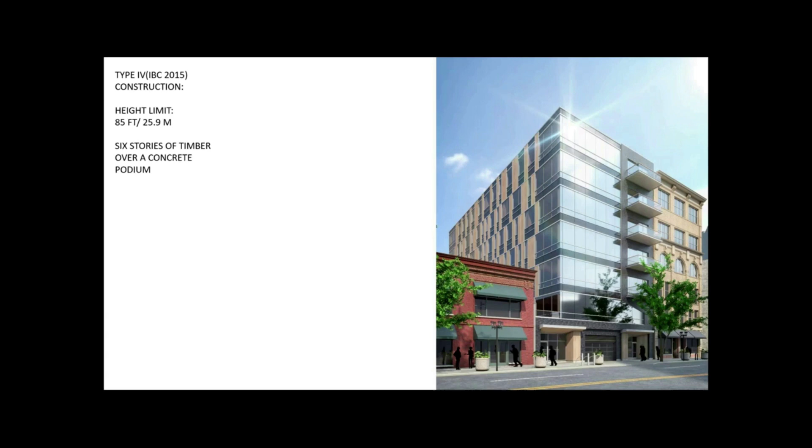Typically, we start off with what's allowed as of right in most timber construction in the US. Here in Wisconsin, we operate under the IBC 2015. We are allowed up to 85 feet in height and up to 7 stories - 6 stories of timber over a concrete podium. This is another small project we designed for the same developer as Ascent, but it represents what is as of right in most of the US.

But then in February of 2022, Intro Cleveland opened up, and it became the first mass timber high-rise approved and built in the US at 9 stories tall. It's 7 stories of timber over a 2-story concrete podium, and for a brief while was the tallest mass timber hybrid building in the US, and remains, I believe, the largest by volume in terms of fiber.

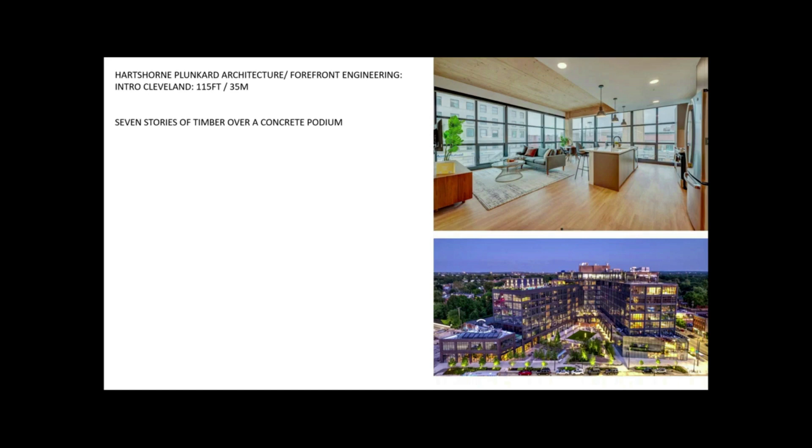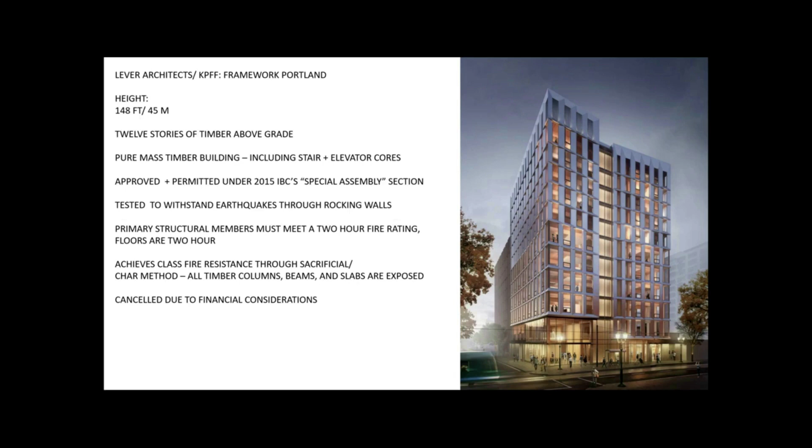This is Framework in Portland, Oregon, and it is important because it is the first mass timber high-rise building to have been permitted in the US. It's 12 stories of timber. The superstructure is 100% timber above grade, and they used the AMMR language - the Alternative Materials and Methods methodology - to achieve approval under Oregon's building code. The project was permitted, as I said, but it was never constructed due to financial considerations.

Until recently, the tallest mass timber hybrid building in North America was Brock Commons in Canada. It's 18 stories, 17 floors of timber over a 1-story podium. Brock Commons achieved approvals through a 100% encapsulation strategy, which means there is no exposed timber in the building.

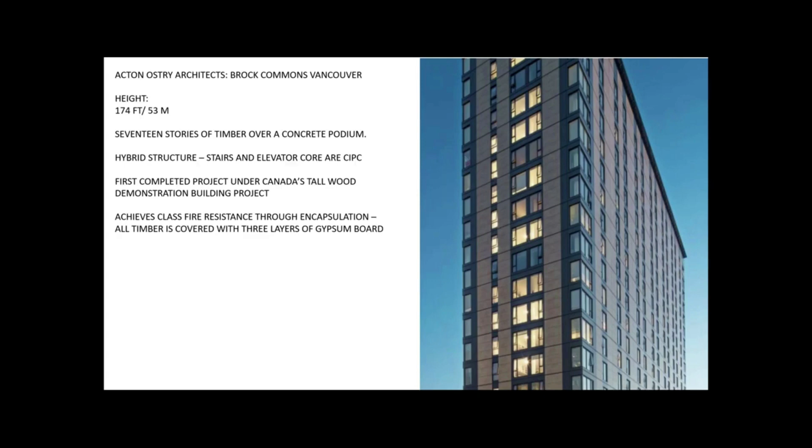Until Ascent was complete, the tallest mass timber building in the world was Mjøstårnet in Norway, and it is about 280 feet tall, and it is also basically 100% timber above grade with some steel embedded in it.

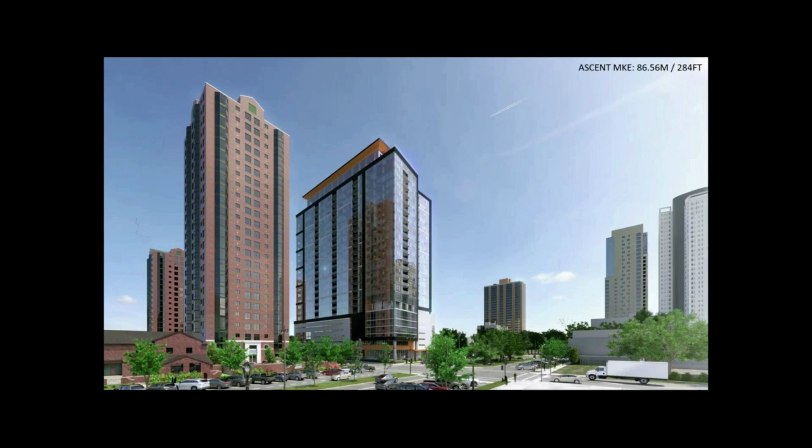So our project, as proposed, Ascent, ultimately grew from 19 to 25 stories during design and ultimately topped out at 284 feet. Here's a rendering of the building prior to construction.

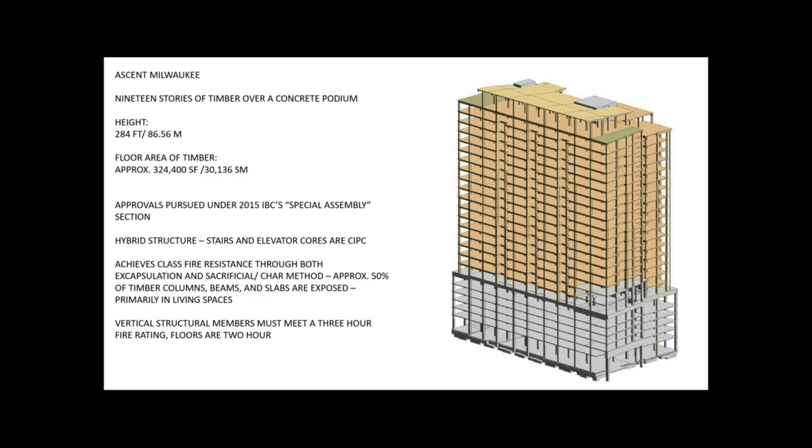The alternative means and methods path to approval requires independent testing from an independent third party. In our case, we needed to perform the world's first 3-hour fire test on a glulam column. We were fortunate that just 90 miles west of us is the USDA's Forest Products Lab in Madison, Wisconsin, and they offered to perform the tests, which were conducted from December 2019 through January 2020.

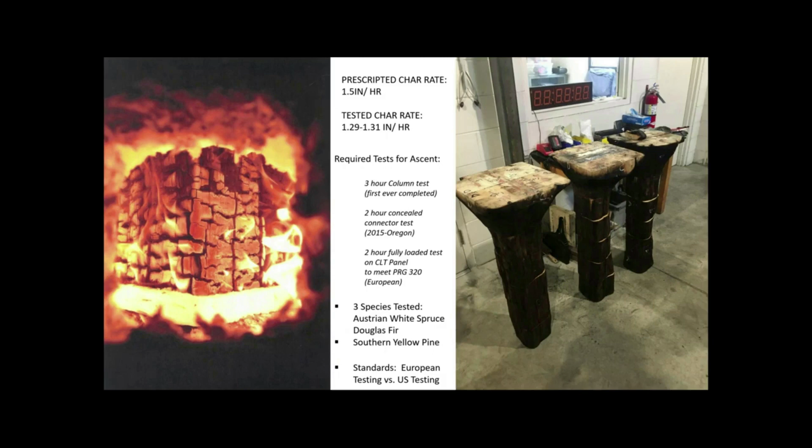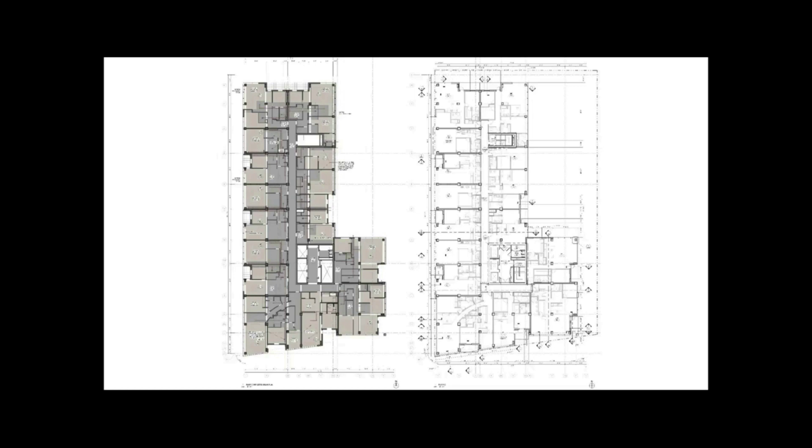Here we are, a typical floor plan, so it's an L-shaped building. More interestingly, though, is the drawing on the left, which is the ceiling plan. Anything that is gray has a drywall soffit for a finished ceiling, and anything that is tan is exposed mass timber. So you can see that basically the entire perimeter of the building, including all living rooms and bedrooms, are exposed timber.

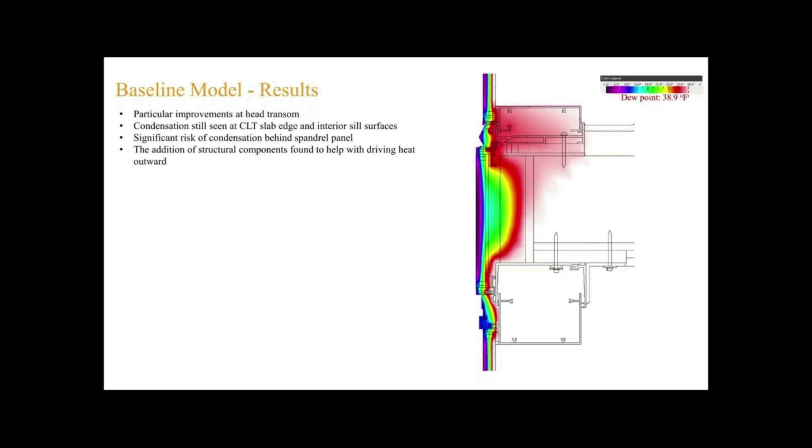So this is the original model. We worked with Arup out of New York as our facade engineer, and through an iterative process we redesigned some of the mullion dies to keep that dew point well and truly out of the timber assembly. This was the window wall system ultimately constructed at Ascent, and you can see how far away from the timber that dew point is.

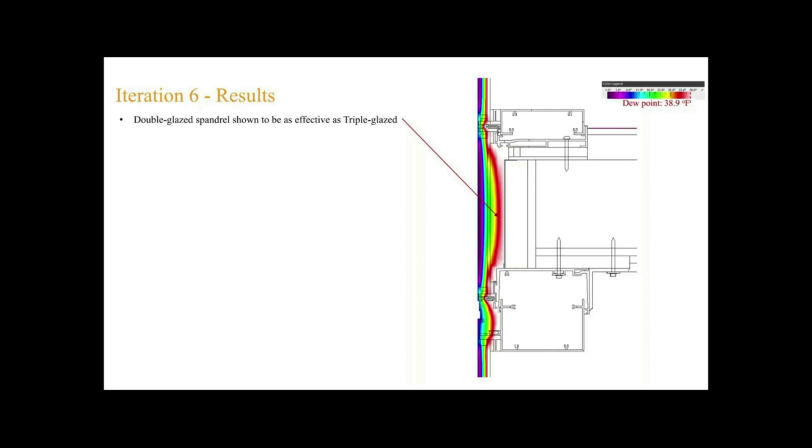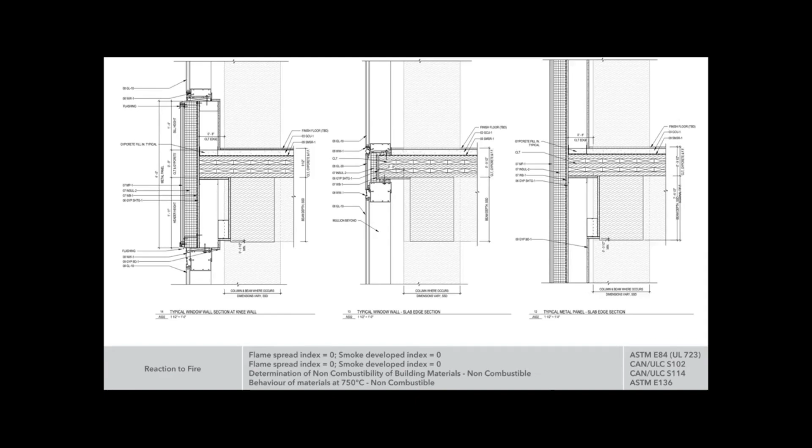A commitment we made to the city of Milwaukee was that the entire exterior envelope of this building be non-combustible. We went through, during design, a total of 64 MEP coordination meetings.

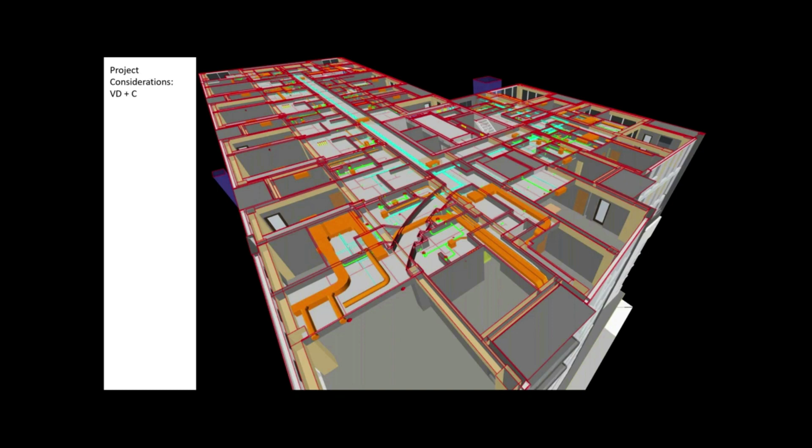The building has an entirely digital twin that was then fed into the CNC machines at the manufacturing site in Austria. Of the thousands of penetrations in the building, 99.9% were successfully located and drilled in the shop. There were a few that got missed, but out of thousands of penetrations, we had to field drill maybe 5. This was a very intense effort, but ultimately very successful.

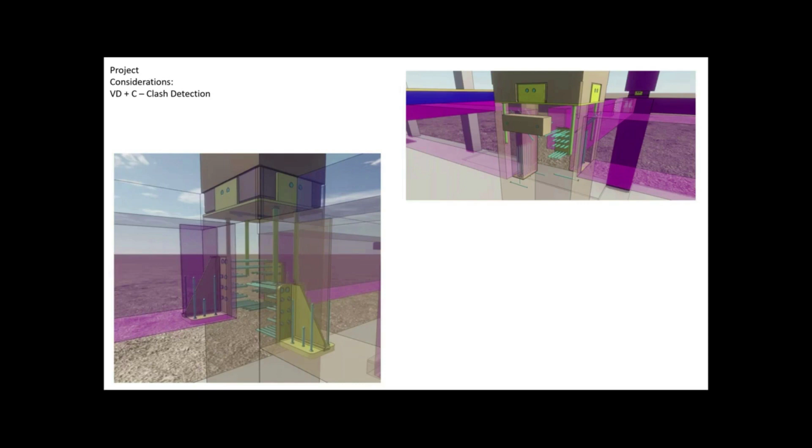The second round of VDC, virtual design and construction, was around the actual structure of the mass timber. An interesting challenge the team ran into was that the timber columns in particular continued to get smaller as the building went up. However, the hardware remained the same, so near the top of the building it was becoming increasingly difficult to have the fastener screws not conflict with each other. It got very tight at the top, but ultimately we made it work.

As luck would have it, our commissioner at the time, Preston Cole, had a background in forestry. He was familiar with the technology, and he didn't give us a blank check, but he did instruct his staff to work with us to see if there was a path to approval. We started those meetings in the summer of 2018.

The project was unveiled in the fall of that year, and we immediately started working with the Milwaukee Fire Department to get their input on how to make this building as safe as possible from a firefighting perspective. Again, luck played a role here: Chief Roden, who's on this presentation, was already an early thought leader in firefighting circles around mass timber, and the Milwaukee Fire Department became a great partner in this process.

We applied for a footings and foundation permit and 3 variances in February of 2020. We had our final conference with city staff in May of that year, and all permits were issued at the end of July. Construction started in August of that year, and the project was completed just last summer.

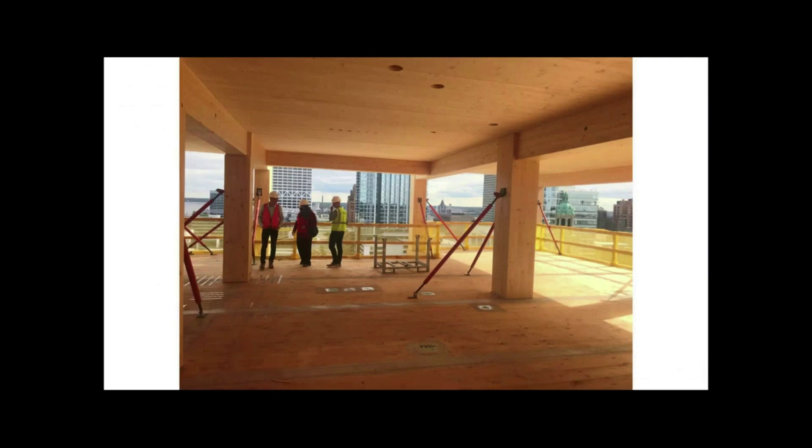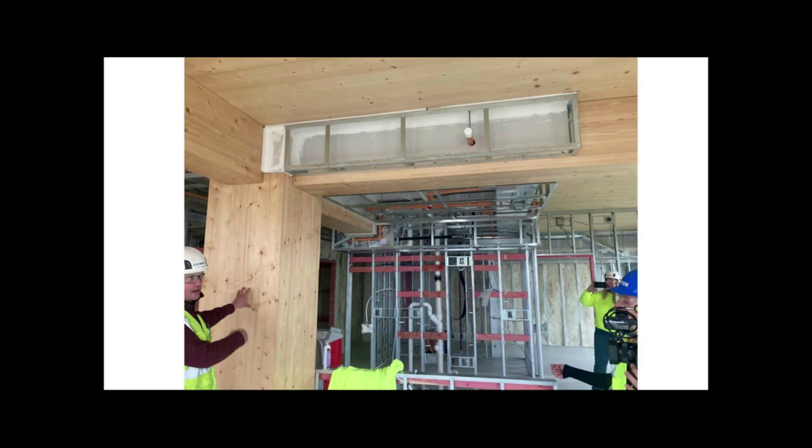A few photos during construction. Here we see the raw timber in the early stages of timber installation. If you look carefully, you can see all of the penetrations are already in place, the larger ones are plumbing, and you see a few penetrations in glulam beams for fire protection. That coordination became so important because we wanted to minimize the soffits wherever possible, which meant that a lot of the MEP systems were very tightly packed into these spaces.

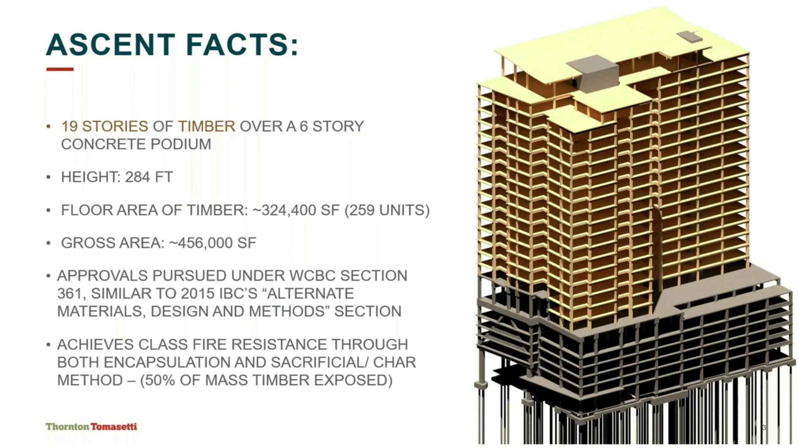As Jason mentioned, we're 19 stories of mass timber over a 6-story podium, approximately 284 feet tall. We were approved under the Wisconsin Commercial Building Code, which is very similar to IBC 2015, utilizing the alternate materials design methods section. Our fire rating and resistance was achieved primarily through a combination of encapsulation and a sacrificial char layer, with about 50% of our mass timber being exposed.

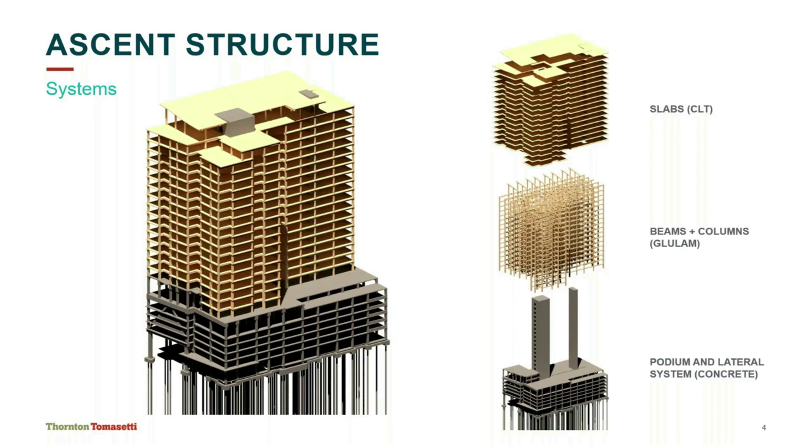High level for the structural system, we have a reinforced concrete post-tensioned podium structure for the parking levels at the base. We have glulam beams and columns up the height for the superstructure, and a CLT slab for the floor framing, with reinforced concrete core walls up the height, which Eric will discuss during his portion of the presentation.

In terms of structure, mass timber is significantly lighter than its concrete counterpart. So one of the benefits was, from a foundation perspective, your foundations can be slightly lighter.

In addition, for this specific project, we did additional load testing to significantly increase the capacity of the piles and foundations we were utilizing. Interestingly, we were limited not by the geotechnical capacity, but actually by that reaction frame you see there. That's what limited the value we could actually test to.

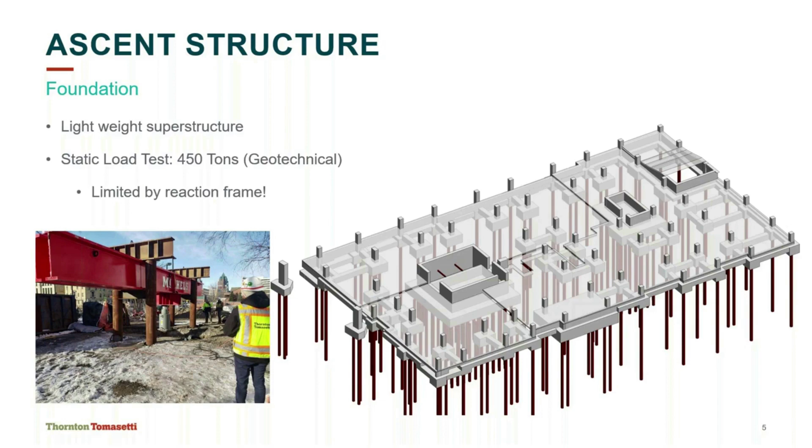Worth noting, these piles, because we actually tested them versus using the standard IBC capacities, we were able to nearly double the capacity - same pile, same material, but just by testing we doubled the capacity of these piles.

As we move up the height of the structure, on the bottom right here you would have our typical parking level, which is between a 7.5 inch post-tension 2-way parking slab. Then as you see in the upper left, this is really when we start to marry the two systems.

So the concrete structure versus the mass timber structure - as you can imagine, the column grid for a mass timber building is not the same as a column grid for a parking structure where you need the large drive aisles below. So what we utilized is we had an amenity level where we already had space for this mechanical alcove, and in the upper left there you see a pool structure.

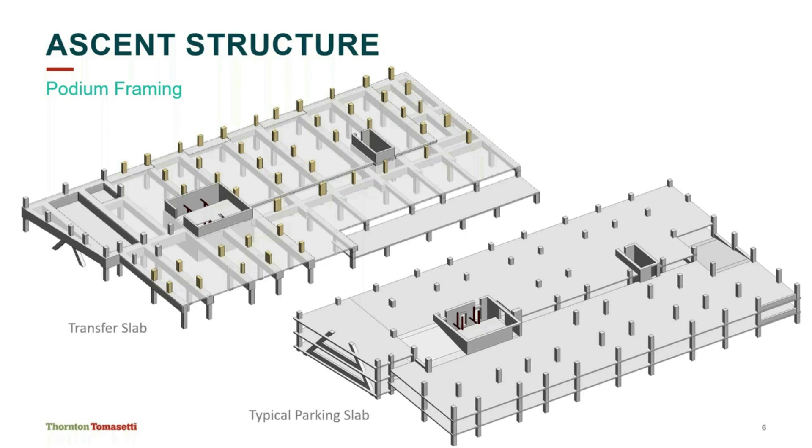We used actually a stage stressing because the mass timber was so light that a majority of the weight of the structure actually was - which we'll get into in a minute - the topping slab on top of the mass timber. So we had to stress it in 2 different sequences to make sure we didn't overstress the beam so that you'd see cracking on the top of the slab.

So the primary portion of what we're here to talk about today - this is a typical mass timber floor. What we have is a roughly 5-ply, roughly 7-inch thick CLT floor slab spanning one way, even though everyone knows CLT is a 2-way spanning system. It's primarily typically a 1-way span.

Those spans ranged anywhere from, on average, say 16 foot 8, upwards of 20 feet spanning for the CLT to glulam beams, which typically span on a skip grid, as you can see around those balcony cutouts, anywhere from 20 to 25 feet. Those then span to our glulam columns at the corners and at the perimeter.

Those glulam columns were shaped also to allow for architectural features, but also with this idea that we'll get into a little later of this char method.

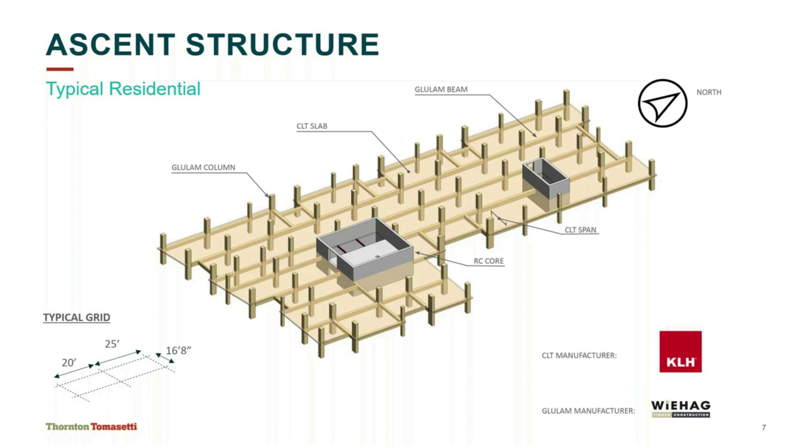And then you can also see on this presentation that we had the reinforced concrete core walls, which were part of the lateral system. They were actually designed such that from a construction method, they could be cast the full height of the tower without any of the CLT or mass timber acting as diaphragm. In addition to the structural uses of the concrete cores, this was also a discussion that I'm sure Eric will get into in terms of the variance process we went through utilizing a reinforced concrete core for the lateral system.

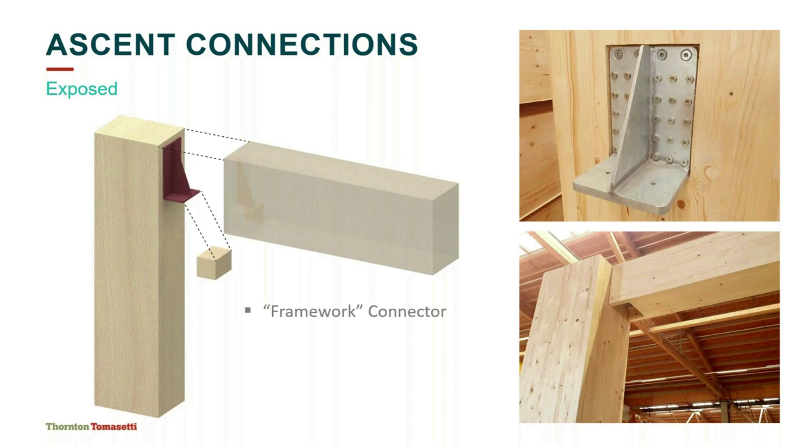In terms of the actual connectors, we talked about the members, but there's many different connectors - really 2 primary connectors on the job. What you see here is whenever we had an exposed connector, meaning beams and structure that was going to be exposed, we utilized what we call a framework connector based on a job and some research that was done in Portland, Oregon, which I'll get into a little bit later. This idea of having a shelf angle out of steel with a knife plate that gets recessed into the beams in the field, with the blocking below, so that the mass timber is actually protecting the steel element in the connection - this was previously tested.

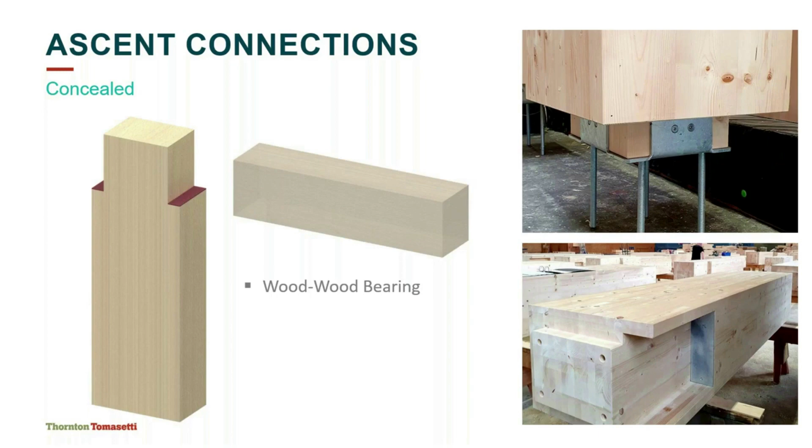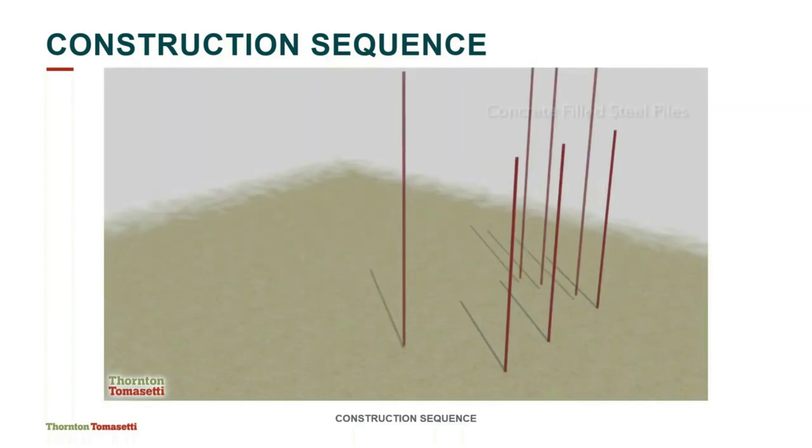What you see here, hopefully, is a construction sequence video real quickly, just so you can see the structure in 3 dimensions come together. At the base, you have these 16-inch concrete filled steel pipe piles that were driven approximately 150 feet into the ground. You can see the PT parking structure being constructed, followed by the transfer level I discussed.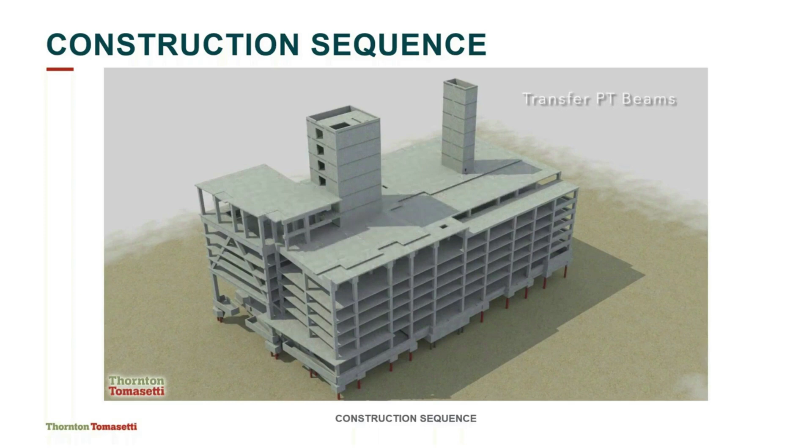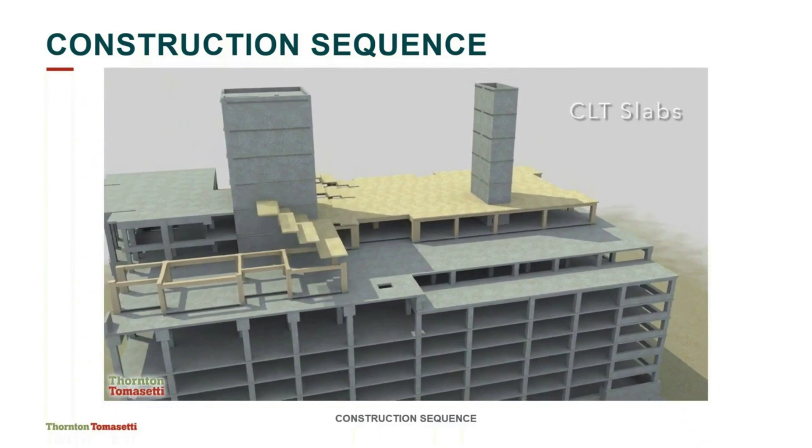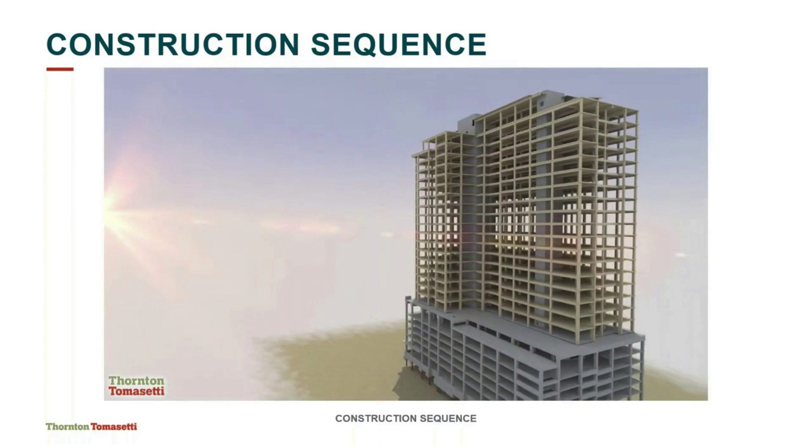And then you can really just start to see the parts and pieces - the glulam beams and columns being set into place, followed by the CLT diaphragm. It's worth noting that because the CLT was our diaphragm, once it was set in place and engaged into the core, they could really remove all of the bracing and shoring that were required, which, if you did standard PT construction, tend to live for a bit longer and maybe impede some of the mechanical and trades that would have to occur below the level.

So things to consider that are a little different on Ascent or mass timber in general - obviously this idea of the material you're using. I'm sure everyone's aware that different species of wood all have different visual appearances - a whiter spruce to a red Douglas fir or a yellow southern pine - but those appearances also play into the material properties, whereas with concrete, the strength isn't necessarily visible in the color. It was one thing to work with ownership to understand what species they wanted, because it had a direct impact on the strength and capacities we'd be able to get as a structure.

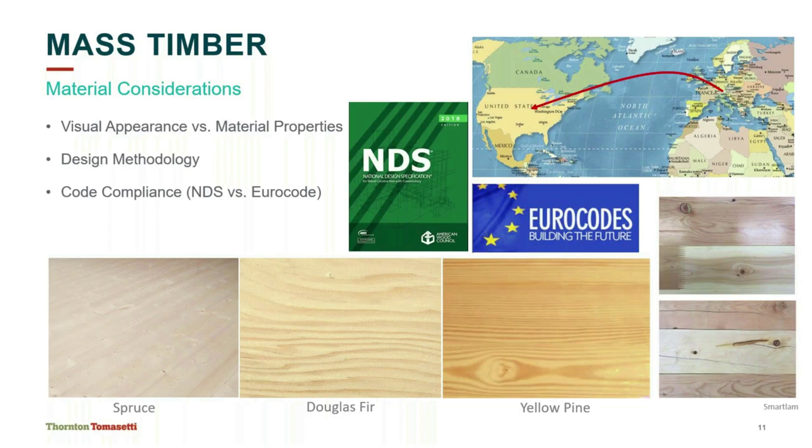The other unique thing is this design methodology. What we ended up doing for Ascent was we got all of our wood from overseas in Europe, and as a result, all the European species and grades are graded and processed to a different standard - in this case, the Eurocode standards. So as a design team on Ascent, we actually had to do 3 separate designs: an NDS or US code compliant design, a Eurocode design for the species in their own code, and then a hybrid design to verify compliance, where we took those parameters and converted them into what we thought was the appropriate design, all to make sure we were code compliant with IBC, which is what was used in the Wisconsin Commercial Building Code.

Other things I'm sure people are well aware of is this idea that with mass timber, sound and vibration considerations need to be taken into account, because it is so much less dense than concrete.

I'm sure Jason touched on some of these floor assemblies and the idea of utilizing 2 to 2.5 inches of gypcrete, one from a fire protection standpoint, but also primarily from a sound and acoustical perspective, as well as the acoustical sound mats and things that are included.

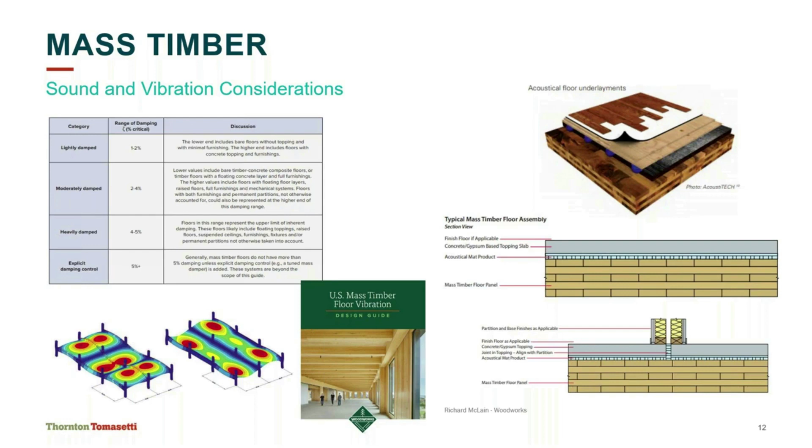We also did a vibrational analysis, similar to something you might do at a high-end office building with a composite steel structure when you're trying to push the limits. We did a high-end vibration analysis for the Ascent structure.

One thing people don't necessarily think about, but now with this idea of this new tall mass timber, is vertical compensation and surveying, something that's really common in other materials. For example, for concrete, if you did a tall building, typically you have a schedule because you understand over time the building is going to shrink and creep.

So what we did with this project is set up a robust surveying and shimming program such that we could predict over time the anticipated shortening of all of these columns, giving allowance in the field to use shims to make up for this compensation, while at the same time allowing us in real time to get data and feedback from the contractor.

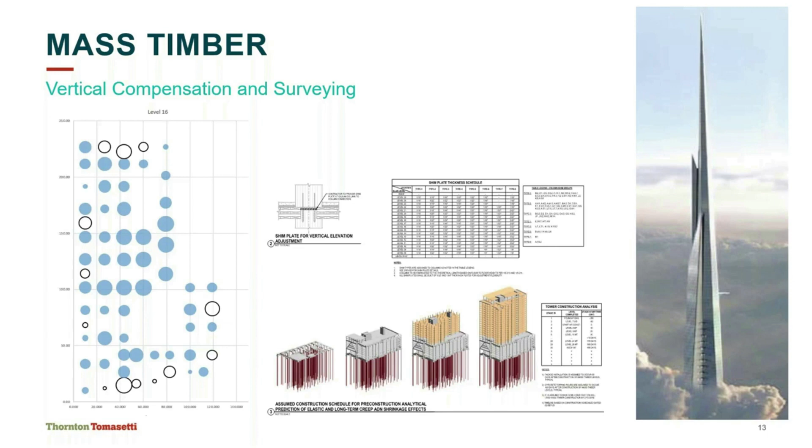It's worth noting, based on our research and what we saw in the field, we anticipated approximately 2 to 3 times the shortening of this mass timber structure versus what you would maybe anticipate in a reinforced concrete structure.

And also, as we've probably talked about and people have seen quite a bit, is this idea of modeling with the mass timber and how critical it was, not just from a structural standpoint where you can see on the left there to make sure there are no conflicts, screws, and very tight clearances.

But also from a mechanical standpoint, the idea that all the trades have to work together, particularly on Ascent where our materials came from Austria, it was very critical that everything was done in the shop. So when it came to the field, we couldn't simply go to a Home Depot to get a new panel or a new beam.

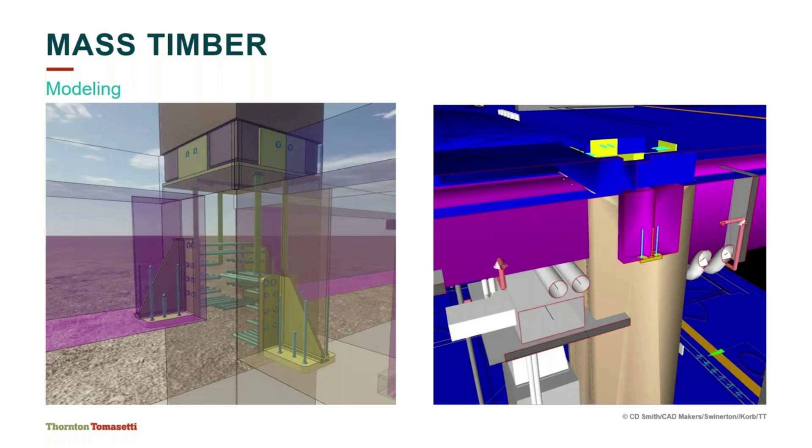So it was absolutely critical that everything was done right and all the penetrations were coordinated, and they came prefabricated in the materials.

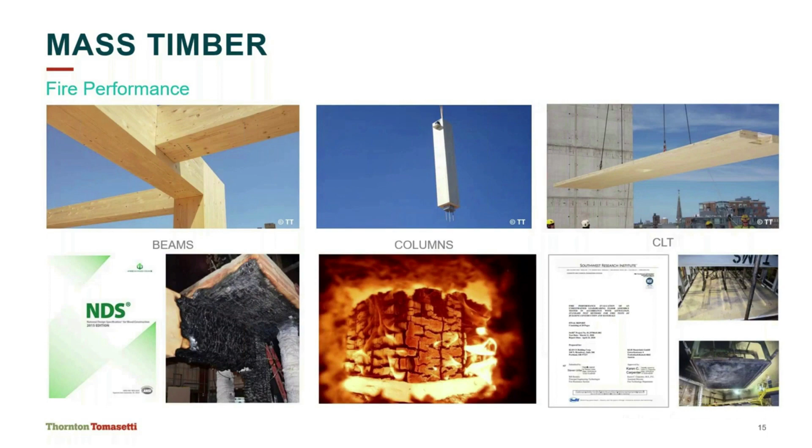The other thing I'll get into a little later is this idea of fire performance for the mass timber and how this married into the process of us getting permitted for Ascent. With that, we utilized the alternate materials provisions of IBC.

The concept is the code wasn't necessarily trying to limit the use of any materials, but really trying to show the authority having jurisdiction that we were going to provide equivalent performance, whether that's quality, strength, durability, or safety. Primarily in this case, we're talking about fire resistance.

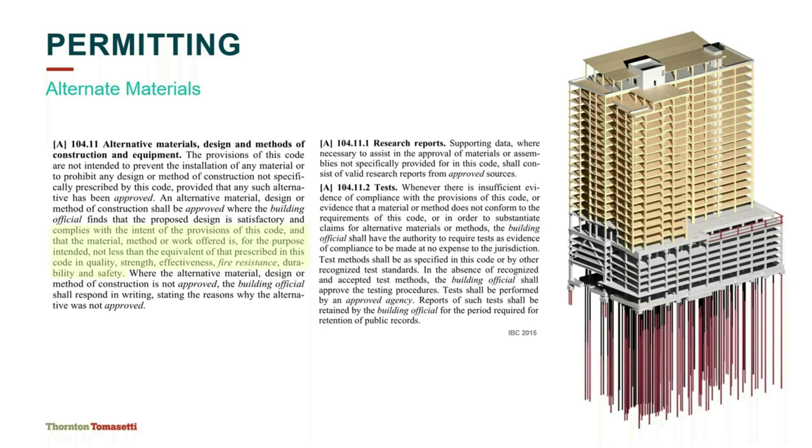As a side note, the Wisconsin Commercial Building Code rearranges some of the parts of IBC 2015, which this was based off, but they have very similar language, as you can see highlighted, for alternate materials.

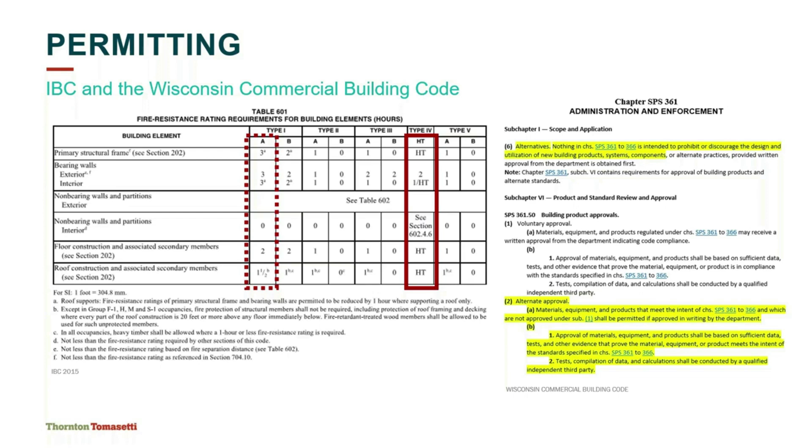As part of the variance process, we were approved as a Type 4 heavy timber structure, keeping in mind this was before IBC 2021. As part of this, we were required to provide a fire resistance rating similar to that of a Type 1A structure, with all the allowances to go to Type 1B similar to any other high-rise structure. So primarily that meant a 3-hour rating for our columns and a 2-hour rating for our beams and CLT slabs.

To achieve this, there are many different ways you can get to these ratings. You can encapsulate the structure, or consider the char method specified in NDS, which you can do via calculations. You can have specific full-scale tests, like for the connection shown there, or do it based on additional testing.

For example, all of the current data in NDS is for up to 2 hours of charring. This isn't necessarily because something happens after 2 hours, but simply because before Ascent, there was no reason to have testing beyond 2 hours.

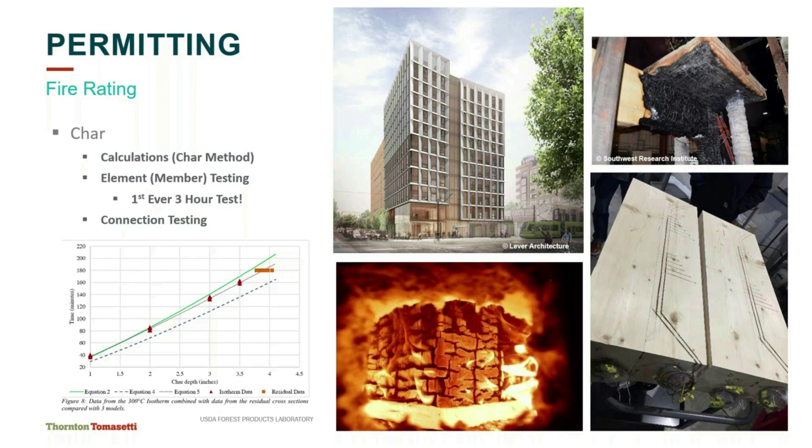As part of the Ascent variance, we actually tested a column for 3 hours to confirm what you can see there: the char depth is either linear or less than linear, so the rate of char over time actually slows down based on the equations you'd see in NDS. What that meant for us is for most of our beams, we utilized the char method in this calculation approach.

For the columns, as I mentioned, we did the char method but also this additional 3-hour column testing. Then for the CLT, we had additional tests from the manufacturer, as well as the char method and calculations we did ourselves.

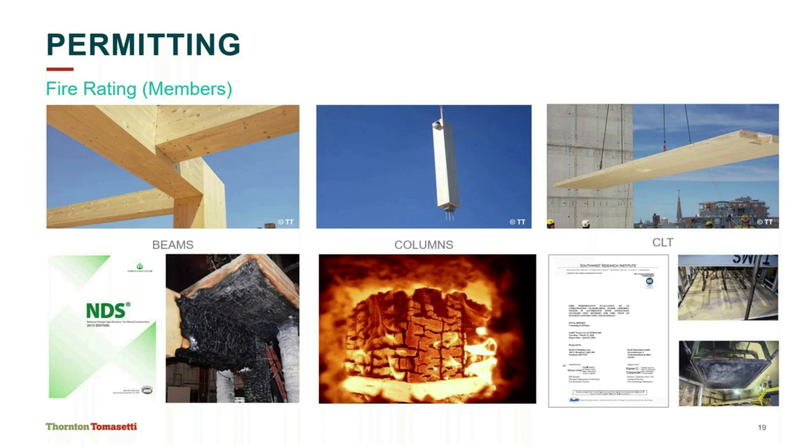In addition, for the fire rating of the connections, there was actually full-scale testing. We call this the framework connector because a project in Portland, Oregon called Framework got federal funding. As part of that, they used a similar approach to permitting with this alternate materials method and completed some testing for this connector.

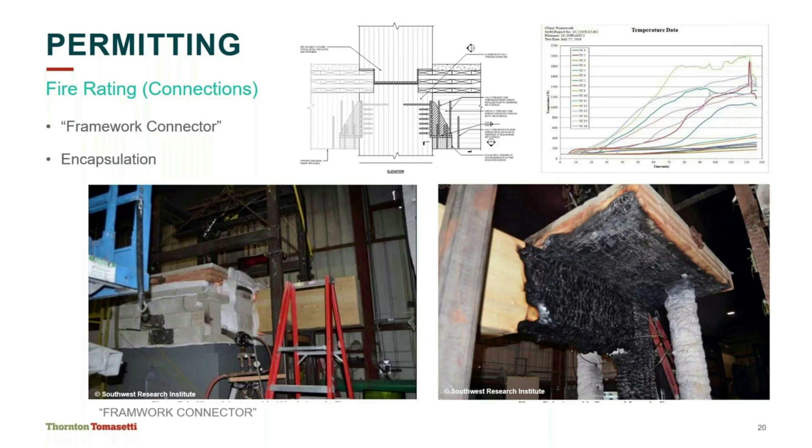So there was full-scale load testing for 2 hours, and that's what you see in these photos, where they confirmed that this connection, or one very similar to it, could maintain the 2-hour fire rating required by our variance and code.

Additionally, I'm sure Jason mentioned, but also Eric's going to talk about a lot of the other requirements that were maybe not structural as part of this variance process.

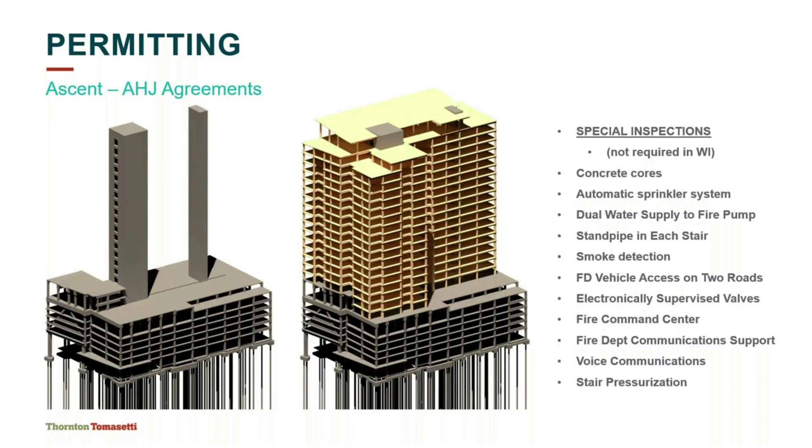The other one worth noting is unique to Wisconsin: there are no technically special inspections, but due to the unique nature of the project, in addition to being the project manager, I also served as the special inspector for the mass timber frame. Thornton Tomasetti had people on site working with the contractor, which was a fabulous experience to solve problems in real time and make sure it was getting built appropriately for the variance we'd agreed to.

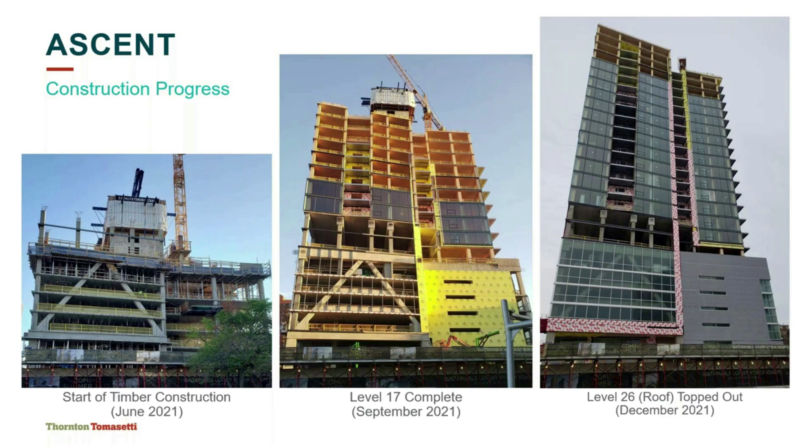Just a few photos here, you can see the structure going up. It took approximately 6 months to go from the start of mass timber to topping out. You see the pictures from June, September, and all the way through December.

In terms of components, to simplify, we had glulam columns, you see on the left, glulam beams, CLT panels, and these timber screws, which you can see in the picture there. We call them screws, but they're maybe not the ones you'd typically think of if you went to a Menards or a Lowe's. In some cases, we had up to 36 inches deep screws.

So really they're quite a bit of work. If you talk to some of the contractors, they'll tell you stories about how, with a battery-powered drill, they could only drill 2 screws before they'd have to recharge the battery. So maybe a little different than what you're accustomed to when talking about timber screws.

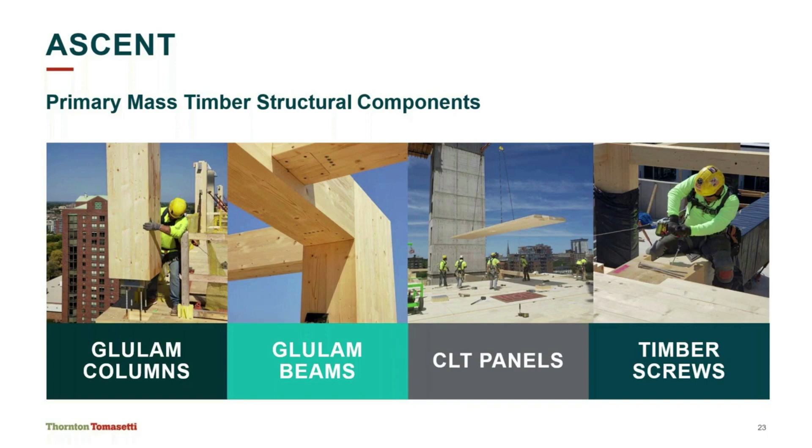In terms of those connectors, we had a couple different ones for the columns, similar to how we had a different connector for exposed and concealed conditions. We had a connector typically used at the perimeter when it was exposed, using an epoxy product where they'd set the epoxy in the hole, utilize the tower crane to raise up the column, and march their way down, setting the column one by one before bracing it.

The next picture to the right is a more typical interior connector, where there's not as much potential for either differential loading or unbalanced loading.

As you keep moving across, you can see the beam, the column, the typical hanger connection. You can see the simplicity and beauty of the connector, where the steel material actually came all the way from overseas. On site, they simply set the beam on the ledge and install 2 screws. So from a fabrication and field implementation standpoint, it really simplifies the time required to set these connections, with the one on the right being the most simplified connector, just a simple bearing connection.

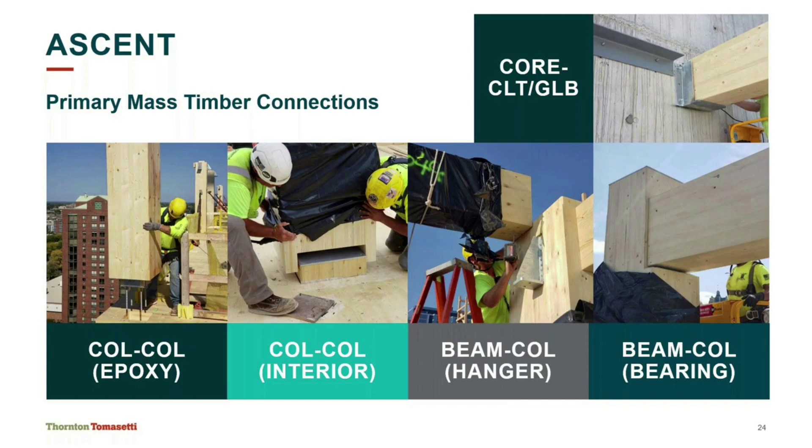We also had, in the upper right, some core connections. As everyone's aware, CLT or mass timber and concrete move differently over time. So what we had were some slots, trying to give the contractor as much flexibility as possible, either through the slots or through post-installing the connectors, with where those connectors lived on the core, since that was done ahead of time, to marry it to the mass timber elevations as you move up the height.

Here's a picture of this in progress as they're starting to set the CLT for the floor above. You can really start to get a vision for what this exposed mass timber structure could look like.

This is a typical floor, with the next photo being the upper amenity level, where I believe the ceiling was 20 to 25 feet - I'll have to check, but somewhere around there.

You can also see those connectors we didn't talk about - those holes were there because the mass timber is so light. We had to consider that this being a 25-story structure, with uplift winds at the top, needed a more robust connection to actually drag that force down into the structure. In some cases that meant we needed to take that tension force down 2 or 3 floors before we got enough weight in the structure to hold this down for potential code uplift wind loads.

Also worth noting, everything I talked about here was under IBC 2015, which was what our project was more or less approved under. Everyone is also aware that IBC 2021 and beyond have created new conditions for different types of construction. Important to note, though, that even if IBC 2021 had been around during Ascent, it still would have required a variance due to the exposure and being above 18 stories.

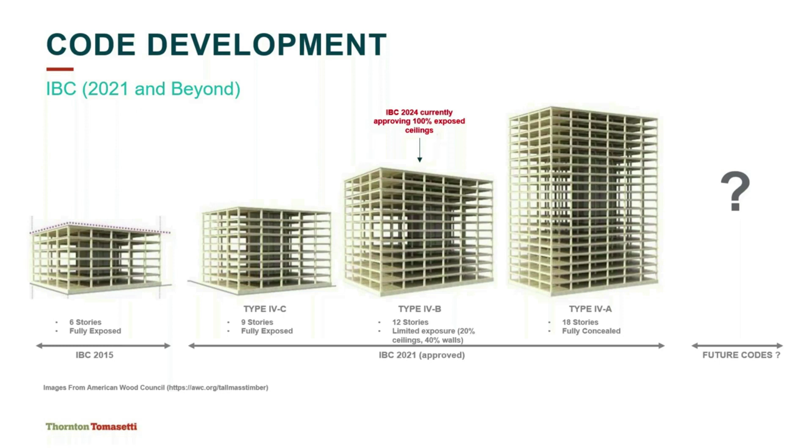The industry continues to get more research, and we'll definitely get improvements and a better understanding of the code requirements for encapsulation and that sort of thing. So I would highly encourage anyone utilizing mass timber to also look into the IBC 2024 preliminarily approved code, just to get an understanding of where the industry is heading.

And with that, I thank everyone, and I will pass this on to Eric to complete the presentation.

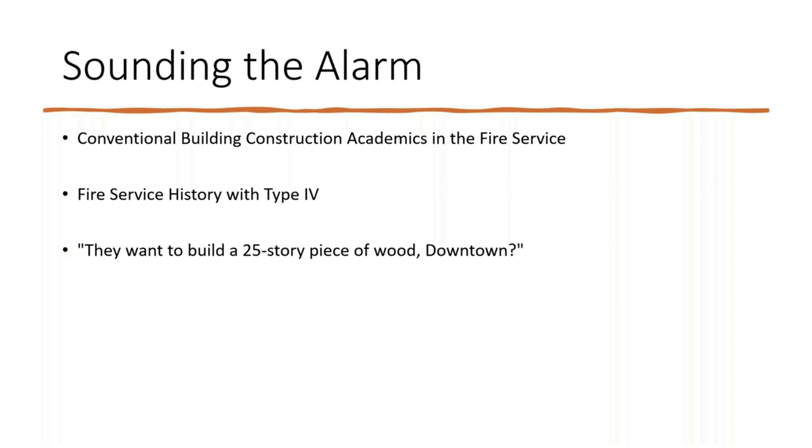Regardless, wood burns more than steel, so there's a cognitive and empirical bias with wood, especially when a historical Type 4 construction method we thought was replaced by steel and concrete undergoes a renaissance and return to favor. Moreover, when this renaissance is on such a grandiose scale as the Ascent, it surely gives the fire service epistemic pause. This is where the seminal question was asked by a lot of Milwaukee firefighters when this was posed to the rank and file: why do they want to build a 25-story piece of wood downtown?

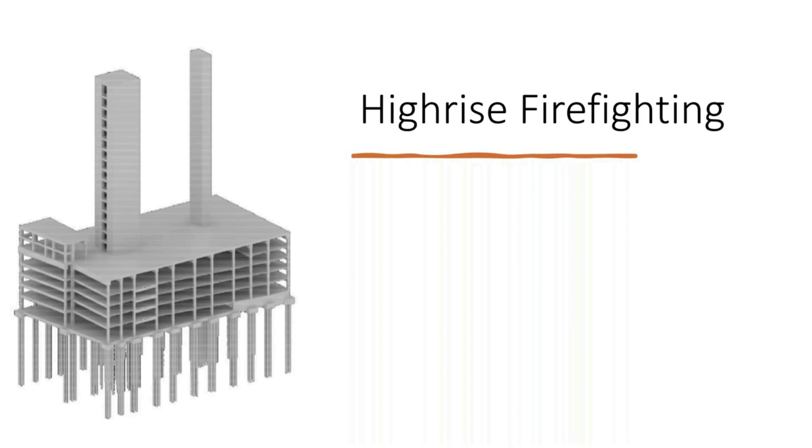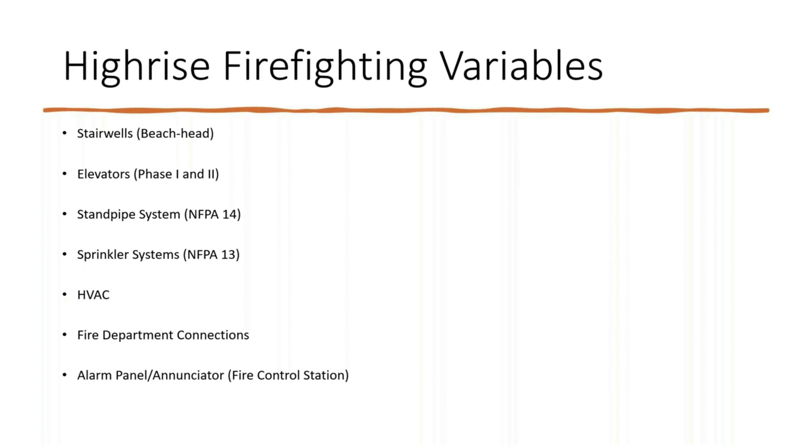Fire departments just need a few simple things to fight fires in these high-rise buildings. We're looking for protected stairwells to operate from and out of, elevators that we can place under firefighter control, phase 1 and 2, standpipes and sprinklers, and HVAC systems to move smoke around. The Ascent apartments each have their own individual HVAC systems, but we're still able to control their environments and allow us to move smoke in and out of these apartments. We're looking for FDCs, or fire department connections, to feed water into the building from fire hydrants, and alarm systems to let us know where the fires actually are in these buildings.

So when discussing high-rise firefighting practices in this building or any other type of building, perhaps the most favored fire protection variable when considering a project of CLT and/or a hybrid CLT and concrete—or any concerns about mass timber versus steel and concrete for high-rise—is that fire departments will be fighting fires in new mass timber buildings the exact same way, regardless of which of the three little pigs' construction types the Big Bad Wolf Fire Department shows up at.

Essentially, we're doing everything the same because they're laid out the same. With that, we'll always launch firefighting operations from the floor below the fire floor, in the stairwell, and use that as our beachhead. We'll designate which stairwell to evacuate occupants through, and use the other stairwell to connect our hose lines to the standpipe system to attack the fire from the floor below.

We'll take a look at the annunciator panel in the fire control center in the lobby to see what floor and or apartment is on fire, and then gain and use control of the elevators and stairwells to get up there.

Once the fire area is located and defined, we'll begin dividing the building geographically into operational priorities, with the fire floor and the floor directly above being most critical in the first few minutes. We'll then focus from the top floor down until we've searched every floor and stairwell for any possible victims.

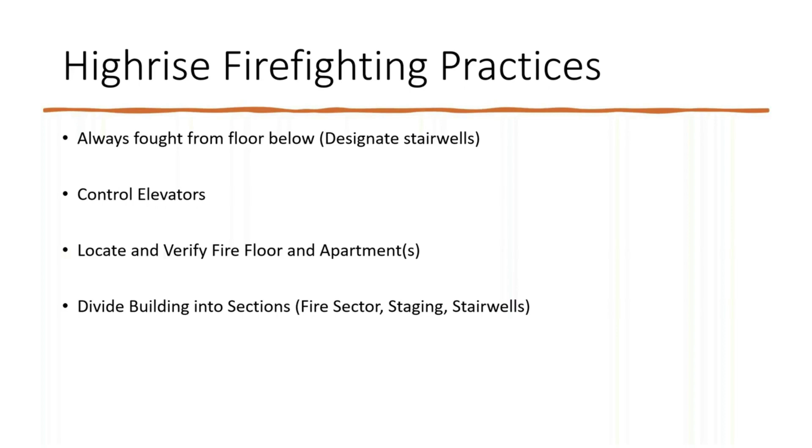So let's get to the story we're here to talk about today. The MFD, like I mentioned, was asked to be part of the Ascent project during its inception, in terms of notifying the City of Milwaukee of its intent to design and build.

The City of Milwaukee's Department of Neighborhood Services was fortunate to have our support in terms of the Chief of Department, Aaron Lipski, and myself, as an advisory board member of Underwriters Laboratories Firefighter Safety Research Institute. Coincidentally, UL had recently conducted their own burn testing in their Building 11 in Northbrook, Illinois, on cross-laminated timber and mass timber. So I was fortunate to be well versed on char rates, CLT connections in design, and other inherent fire behavioral concerns of this type of construction.

As such, the Ascent team from day one had the necessary de facto subject matter expertise to immediately collaborate with a municipal team that already understood how CLT behaved in fires, what the IBC recommended for fire safety and construction demands, and what we would be asking for when we showed up.

I think this saved the city and developers time in getting approvals and buy-in to enter the long variance process we're discussing today. The alarmism wasn't there that I'm sure many interested parties consider or worry about on the fire side in other cities, going back to that seminal question of why would we design a large building made of wood in a dense urban area.